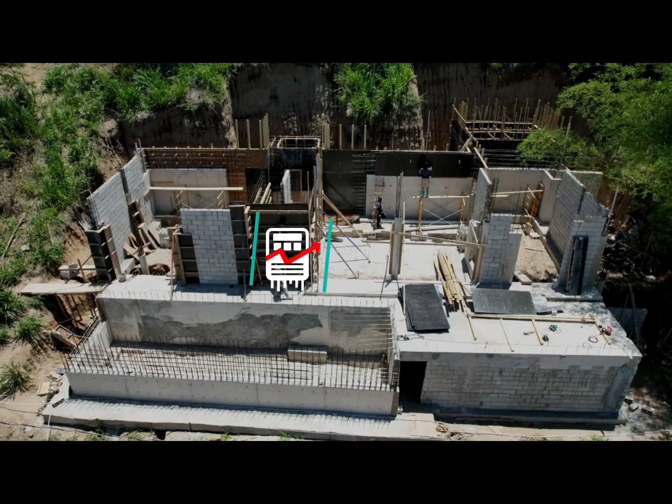Today's video will be me presenting a dwelling that I am part of managing. I'm going to show some details as it relates to where the project was and what influenced certain decisions that were made. For persons who follow the live section, you would have seen me present this model before, but I'm going to present the report that confirms the action that was recommended was justified.

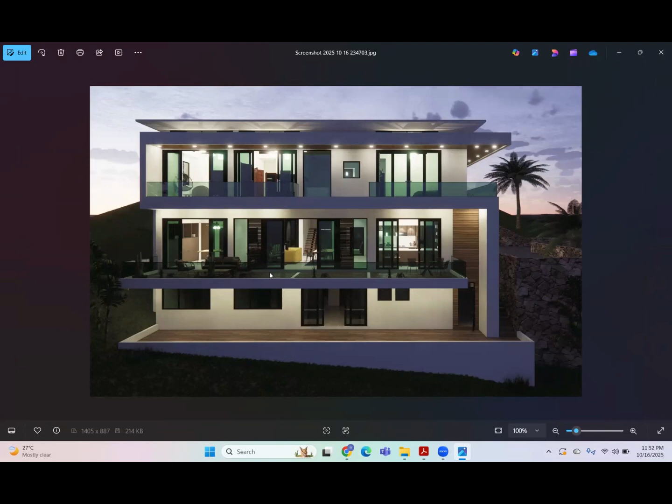The unit I'm making mention of is this design, and the works would have started on the basement floor of the dwelling. So this is what is supposed to be constructed now, and it should be very clear as to where the drawing is pointed.

Along with this design would have been a floor plan, which is similar to this. This was actually reproduced to match the original. I cannot display the person's full set of architectural drawings, but I can show you the reproduced version that was produced to ensure there was clarity.

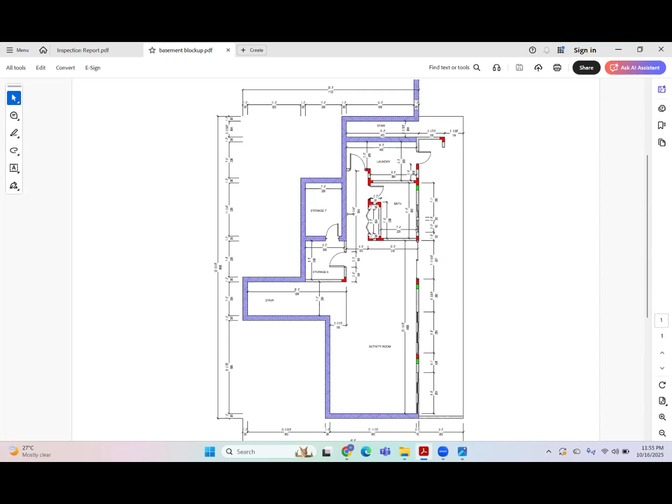So this is the basement alone. There's supposed to be a stairs here, but that's not a priority at the point this reproduction was done. There should be a home area which can be parted into bedrooms, and then you'd have a laundry, a bathroom, and storage. The items you see in blue were expected to be precast walls, or what we call shear walls, and they're all supposed to be 12 inches thick, or 1 foot, if that's more relatable.

So when I got introduced to this project, this was where the works were. When I went in, I immediately advised the person that things were kind of getting out of hand, and that the drawing and the works were not looking familiar to each other.

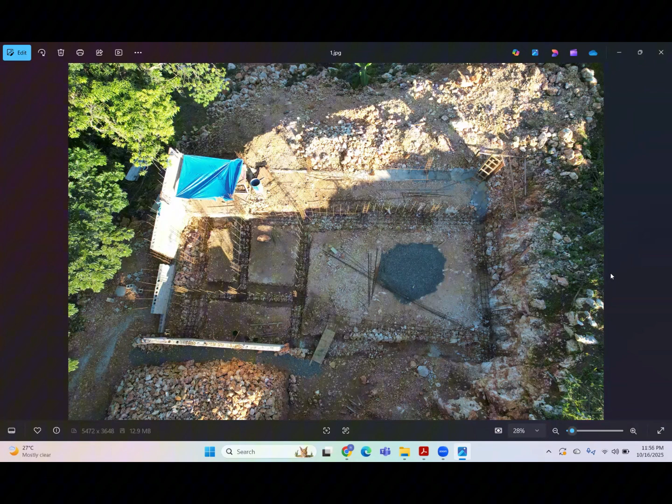So this is one of the drone pictures at the earlier point. This is a second drone picture at a little bit of a more advanced point. And here's another angle of the drone picture again.

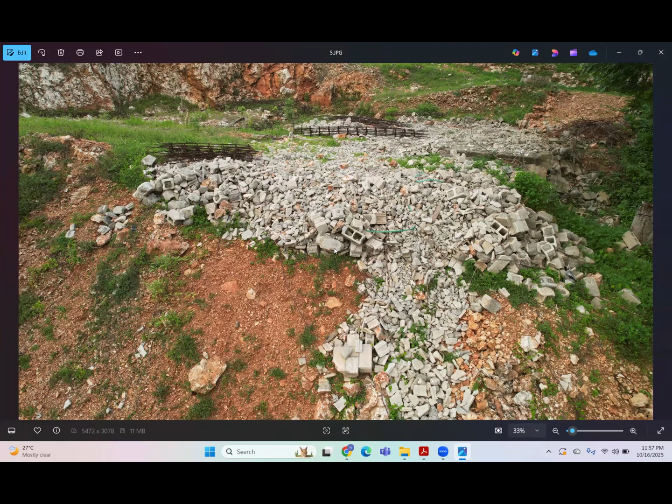At this point, I put my foot down and requested that the customer get an additional inspection done. Many times when you have projects that have issues, persons always tell you about an easy, quick fix and finding a way to just work with it as is. Most times we have learned that taking that approach can be more costly than getting the project properly corrected.

And in this case, it's a burden for the customer because the person engaged to do the work was of no professional standing. They didn't run an organization or anything you could use as leverage to reclaim funds for badly done work.

One might ask the question over and over, why demolish? Why not find a workaround? So I am going to use this to demonstrate why the demolition action came into play. I'm presenting this because I keep being asked the same question over and over.

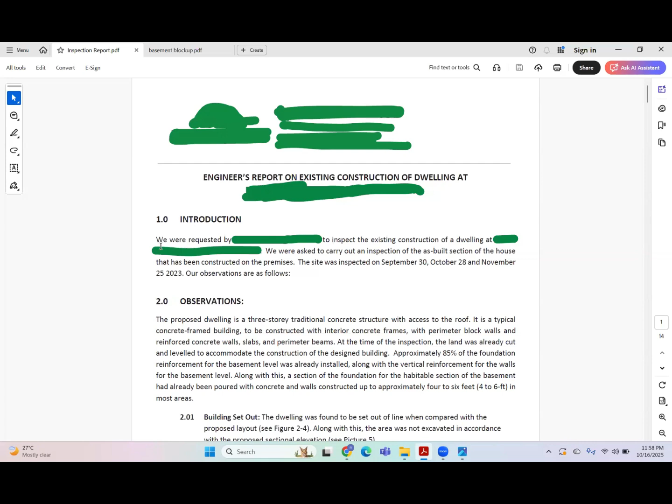So this is a copy of the engineering report. For confidentiality purposes, the engineer's name, the customer's name, and the location of the property have been extracted. I am not going to read through all of this, but I will go through the introduction: we were requested by XYZ to inspect the existing construction of a dwelling at, and this would have been the lot number and location. We were asked to carry out an inspection of the as-built section of the house constructed on the premises. The site was inspected on XYZ, XYZ, XYZ.

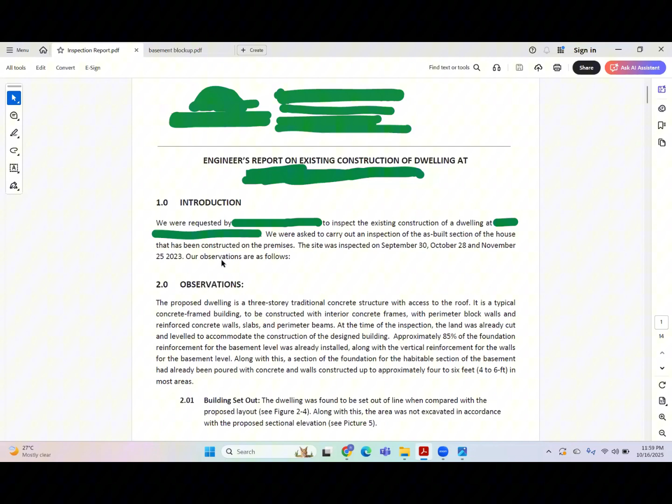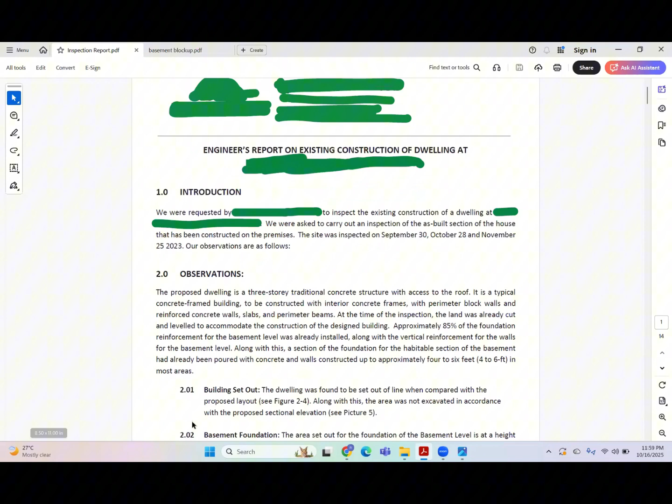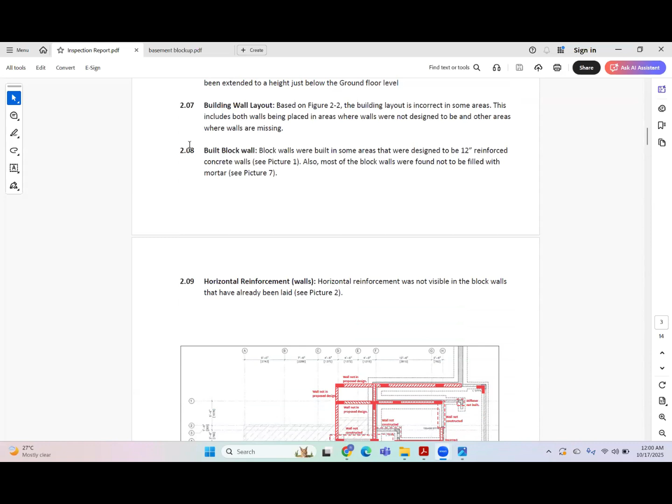Now, for your purpose, because this is 14 pages, what I will do is gently scroll through. You can pause the screen when you want, and you can read through it on your own. So I am going to scroll a bit without saying anything. You can look at the item numbers to see that I'm not skipping over anything.

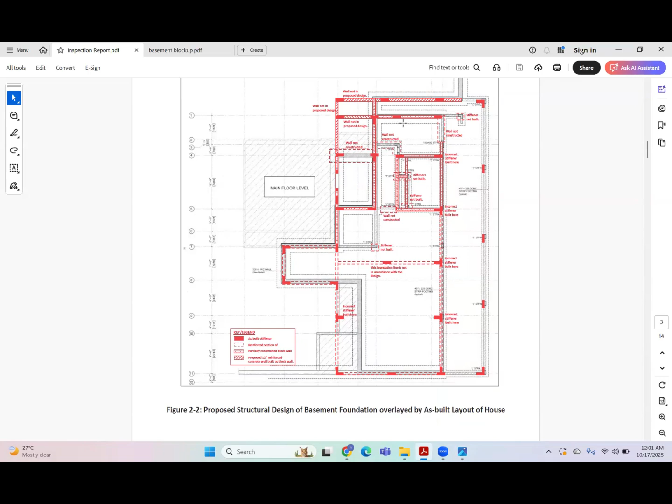Now this diagram, I will mention something in it: the red markers you see here are outlining walls that were in place. Let me bring you back to the images again. So these walls were in place, and I think they highlighted some of the points where potential walls were going to be with these dotted lines. So these are all the red markers, and the drawing is underlaid below, showing that many of the walls are not following the drawing as directed by the architect.

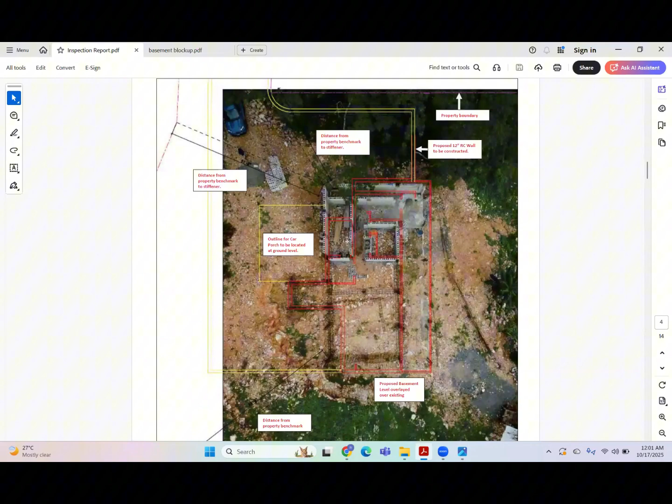Now this is an overlay again, but this red marker is showing you where the proposed walls were supposed to be. This is another site plan again, highlighting the same fact.

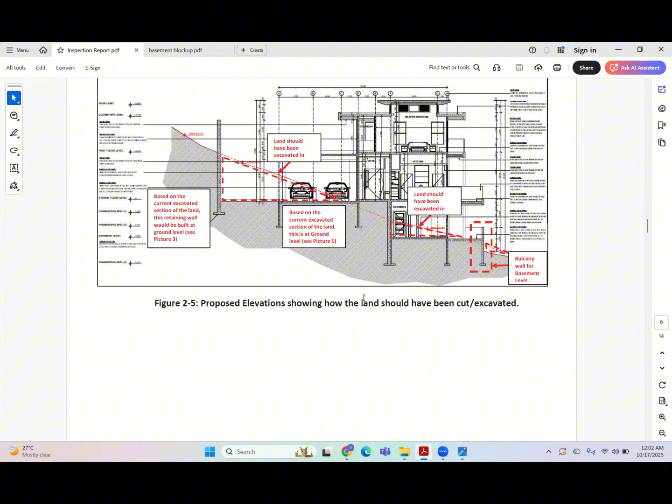I am going to go down a little bit more. So one of the things that the engineer added to their report that I didn't add was the fact that the excavation level that was prepared was contrary to what the drawing was saying. So they were spending some time emphasizing the excavation, and then in this they showed that the dotted red lines were showing where the excavations should have been versus where the excavations were.

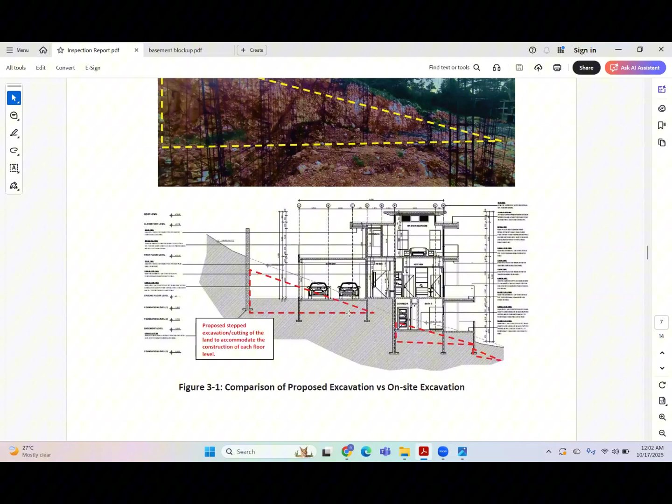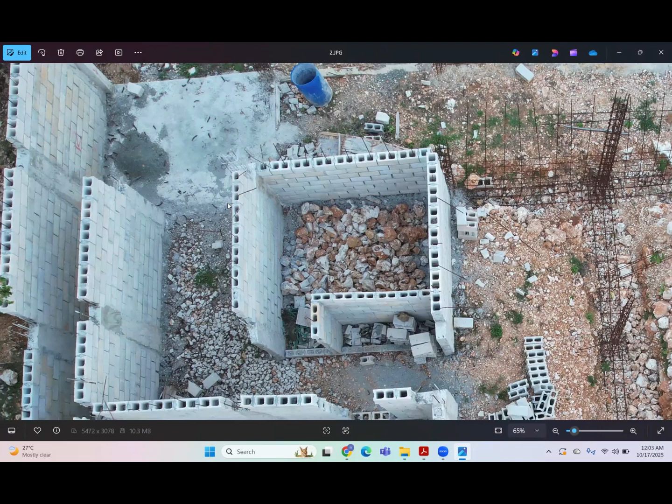And in that case, what it was saying was that the reason why the customer got a small basement area—I'm going to try and show you this little area right here—they created a little storeroom under there, and that was on the basis that the excavation would have seemed like it would have built up height, but it was because the excavation was wrong.

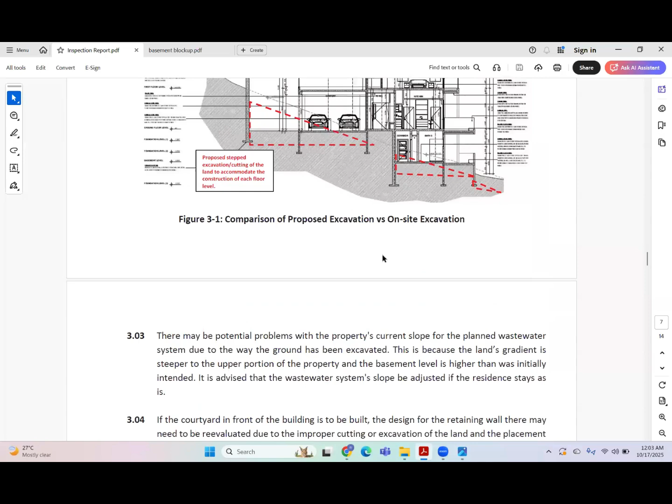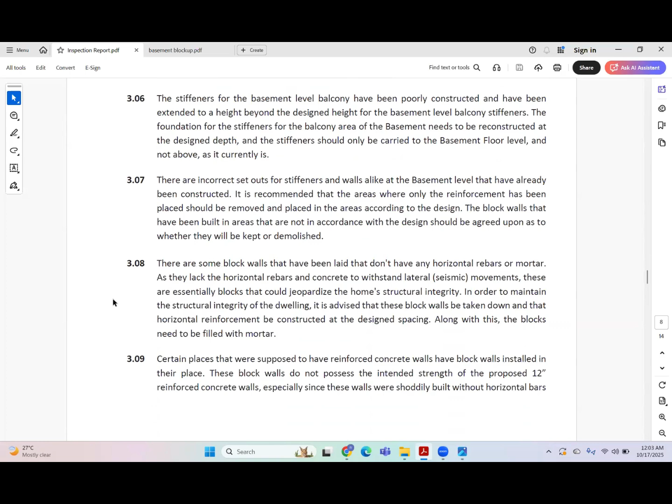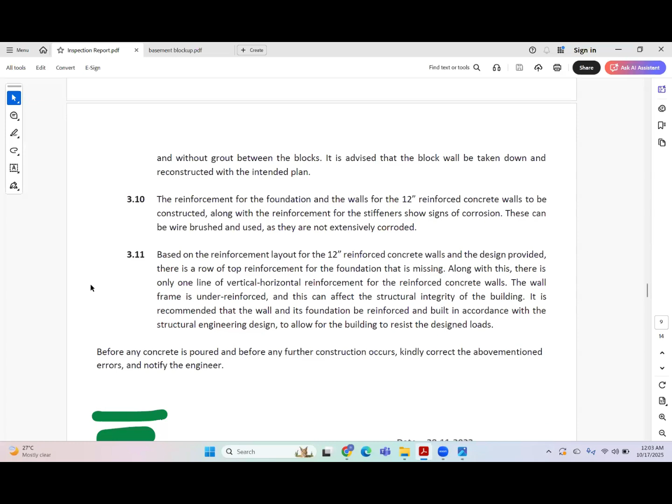So I am going to continuously go through this. Maybe I'm going too fast. Pause the screen and read them out yourself, and then comment in the comment section whether or not you think that based on these statements provided with the report, it would have been reasonable to try and fix the magnitude of errors which were being identified.

Now, one of the things you look for on an engineering report, or any report, to confirm legitimacy is the signature and stamp—that's a big deal. If the report is not signed or stamped, that does not make the report legitimate. In no professional sense can a professional present a document without a signature and have it taken seriously. So the engineer would have signed and stamped the report.

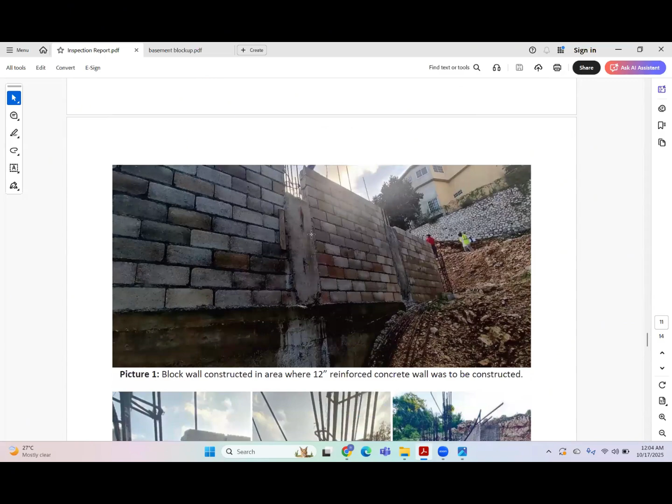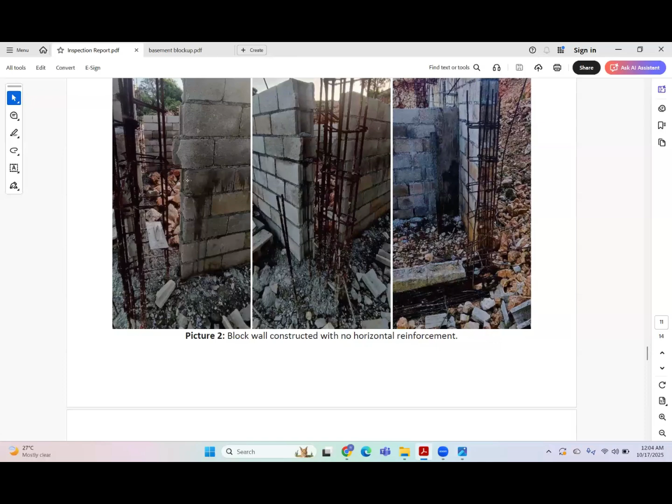Apart from that, there's an appendix area where they were showing pictures of the walls which were wrongly done. They took pictures also of the bad reinforcement. They pointed out that there were no horizontal bars which were part of the drawing, and they made mention of the levels again. So there was a lot of highlighting done.

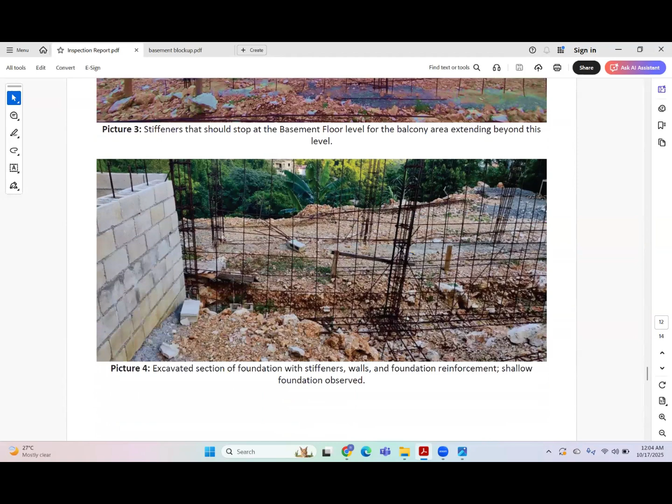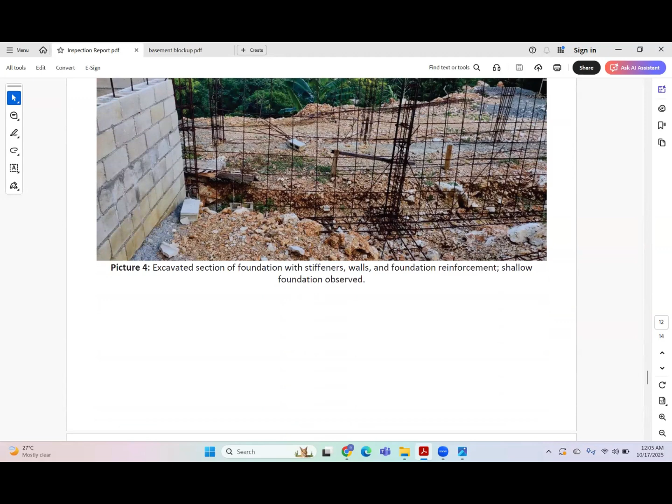These were done a little bit later than I did my report. Actually, this report seems a little bit much like it was my report that was mimicked. I could show you my report, but I would have to mark out the customer's name.

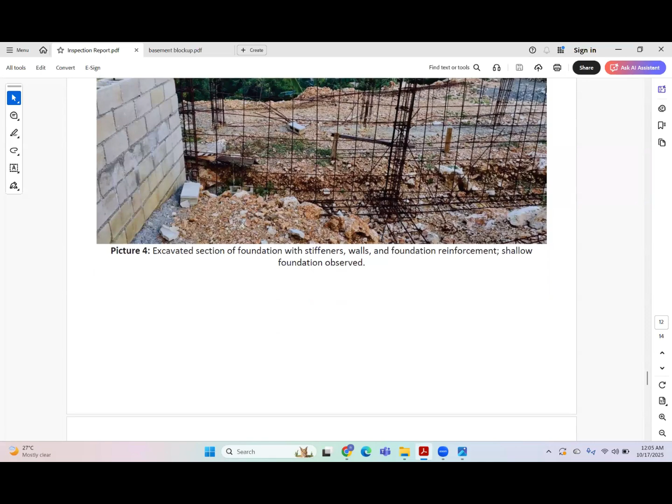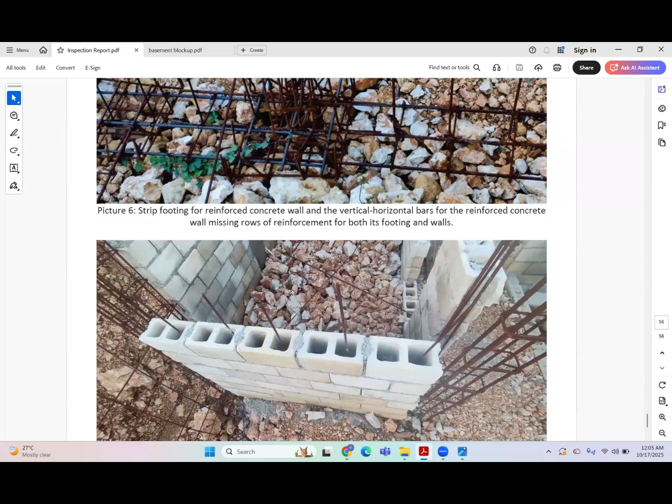So it was my report that actually actioned the customer, because I was determined that I was not going to do anything more without somebody else giving their opinion, and they confirmed that it wasn't that I was picking on the fellow. So these are other pictures from their appendix, I think the last one, pointing out the incorrect blocks, the bad steelwork, and so on.

So this information is required whenever there are disputes on projects, and it was this report which signaled to the customer that they actually were going in the wrong direction.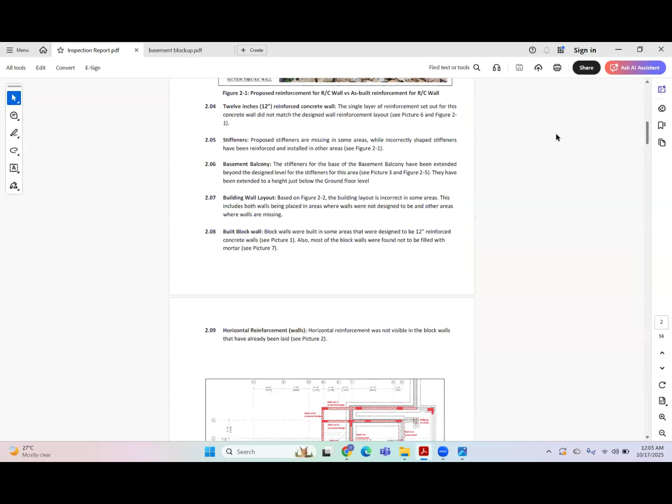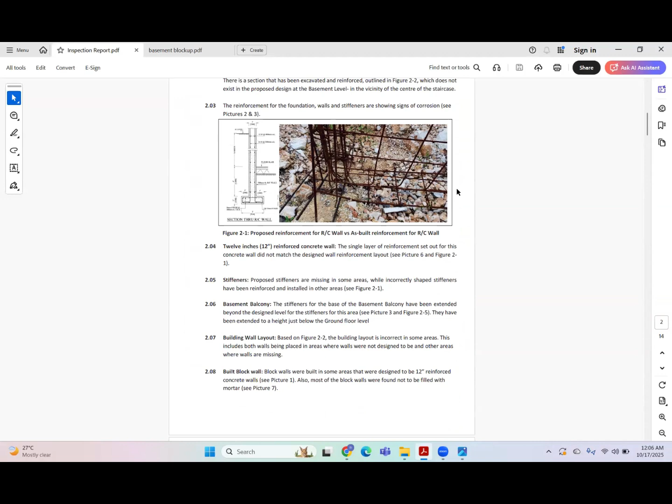Because I think at the point when there's one opinion and there's no counter opinion, many times it can be seen as if you just don't like the person. But in the professional world, it's not about like or dislike—it's a matter of wrong or right. It's either getting done properly or it's not. And if one can make a case and it can be validated, it means that the case is legitimate.

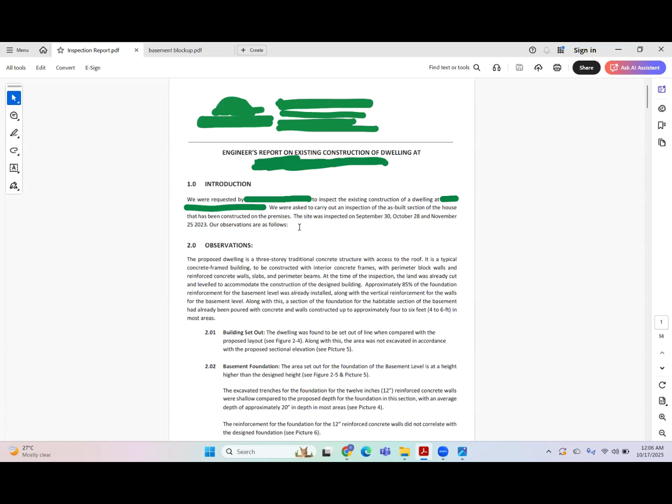But when you have the time, you can go through it and see that it was not a wrong decision on the part of the customer to agree to the demolition. It's a pity though, because all of this money was pretty much wasted. At a minimum, you're looking at more than maybe $2 million, or more than $1 million, going down the line between excavation and concrete related works. But that is better than trying to work with something that was done wrong.

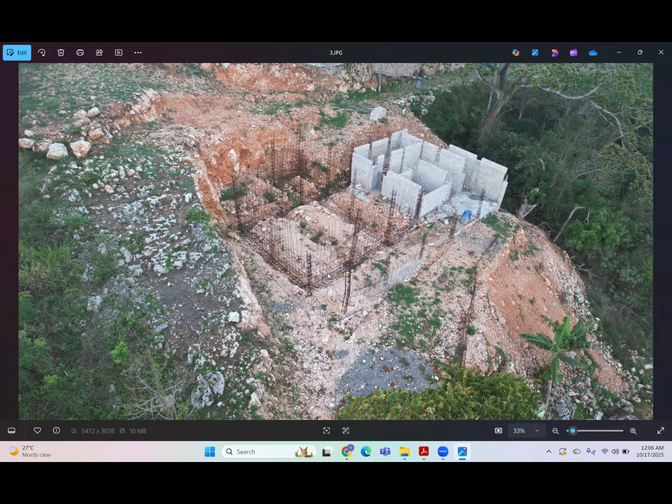And now we can get back to trying to bring this building back to the state it was supposed to be, based on this design. In the other videos that follow from this, I am going to be highlighting the data that was put together to help put this project back on track.